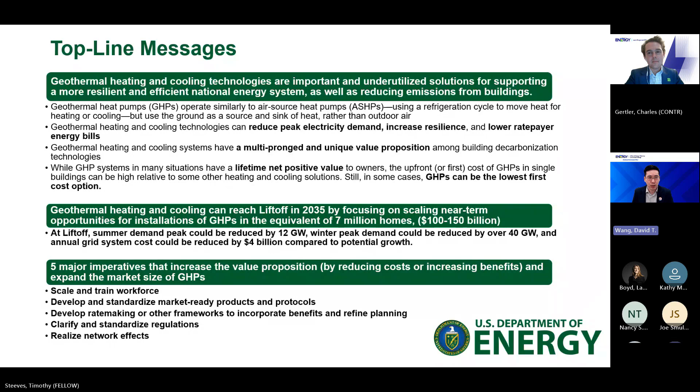So just going through some of the key takeaways first here from Chapter 1, and then we're going to jump into some of the selected analyses. But Chapter 1 is sort of the introduction to geothermal heating and cooling technologies. It describes how they can simultaneously help achieve energy security, energy efficiency, customer resilience, and energy affordability goals at scale, and help manage some emerging load and peak demand growth issues.

And so David described how GHPs operate similarly to air source heat pumps. Chapter 1 also goes in detail into the benefits of connecting buildings via piped fluid at ambient temperatures, the thermal energy networks, or TENs, that leverage the benefits of GHPs. So I promise, I think the only two acronyms we'll keep using over and over again are TENs and GHPs, but they're important ones here. And we'll also describe the value proposition in detail.

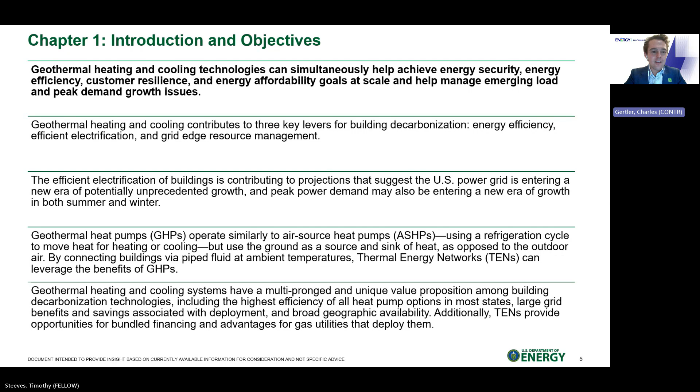So Tim, if we can go to the next slide, I think we'll start just by describing what actually are geothermal heating and cooling solutions. They use the ground as a source or sink of heat, circulate fluids, often connected to heat pumps, to maintain temperatures in buildings. Importantly, they can serve single buildings, they can underpin network systems, and our report focuses on geothermal heat pumps, GHPs, which are the systems that use heat pumps in the shallow earth from a few feet below the ground to about 300 feet.

And these are the systems that operate similarly to air source heat pumps in that they use a refrigeration cycle to move heat around, but they use the ground as a source or sink of heat. And because of that, they can achieve very high efficiencies because they reduce the influence of weather on the heat source or sink. In 2023, there were geothermal heat pumps in about 1.3 million, or 1% of American homes, compared to 13% with an air source heat pump and 86% with no heat pump.

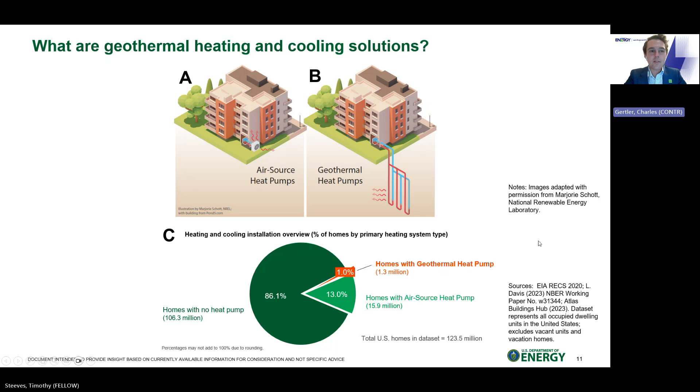And let's go to the next slide here. We can talk a bit about thermal energy networks, or TENs, where a series of GHPs connected together comprise a TEN. So let's drill in here for a second. They connect buildings via piped fluid at ambient temperatures. They leverage all the benefits of GHPs, and they use shared boreholes and heat exchangers that are connected to a shared network of piped fluids. So then they can boost or lower the working fluid to the operational temperature at the building level for heating and cooling.

What I think is very cool about TENs is that different heating and cooling needs within the network can be met at the same time. So you can have a smoothed system. You can imagine a hospital that requires cooling even in winter for medical storage, say, that's connected to schools and apartments that require heating. So there's a give and take that leads to even higher efficiency. And as Jigar mentioned up front, infrastructure and capital needs to construct TENs can be bundled, so utilities can increasingly participate in their construction.

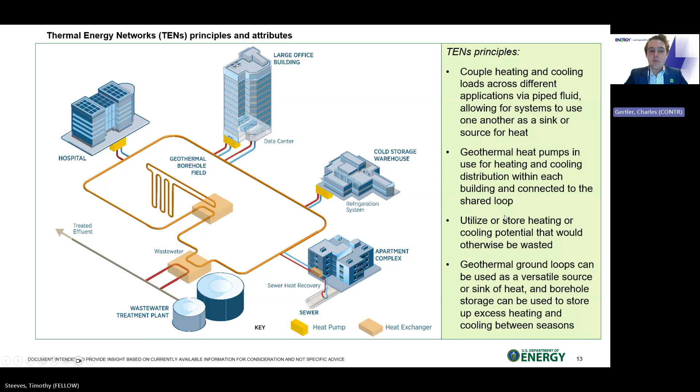So let's talk a bit about the geothermal heating and cooling value chain on the next slide here. It involves a number of different stakeholders and decision makers at every level, from the upstream in the light gray to the midstream in the medium gray to the downstream in the dark gray here on this slide. Each stakeholder has distinct roles, distinct responsibilities. They can be organized at the international, national, regional, or even the local level. And what's more, the way that they collaborate depends really on whether the construction is for a single building versus a thermal energy network, or for a new build versus a retrofit.

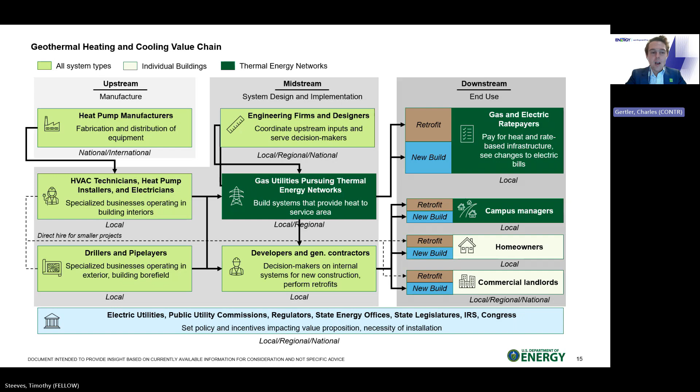So I'm not going to go into full detail on this figure here. It's featured in the Liftoff report, but it maps the sort of complex interactions along the value chain depending on the installation type. Finally, I just want to go a bit into the value proposition on the next slide here.

Stress that, as David mentioned, geothermal heating and cooling systems have a multi-pronged and a unique value proposition among building decarbonization technologies. So first, when you're accounting for weather across the US, GHPs have the highest coefficient of performance, which is a measure of efficiency, of all heat pumps in most states. So this high efficiency means that the potential for reduction in utility energy bills is also the highest among all options for heating and cooling.

They also have large potential grid benefits and savings. So upgrading to GHPs reduces the peak load on the grid in all climate zones, in all seasons, except for winter peak load in cold climate zones. And in scenarios where there's high electrification, the grid benefits can also lead to large benefits in other parameters like summer and winter peak demand and cumulative system cost.

So because of this, GHPs may be the best choice for heating and cooling in a number of geographies, and in particular in colder regions that also experience significant summer heat, like my home state of Massachusetts. They also have very long lifespans. Outside components can last 100 years or more. The heat pumps themselves are shielded from weather, also comparatively long-lived. And expenditures flow mainly to upstream and midstream stakeholders in the value chain, which are predominantly local and regional workers and small businesses, which creates local and regional jobs.

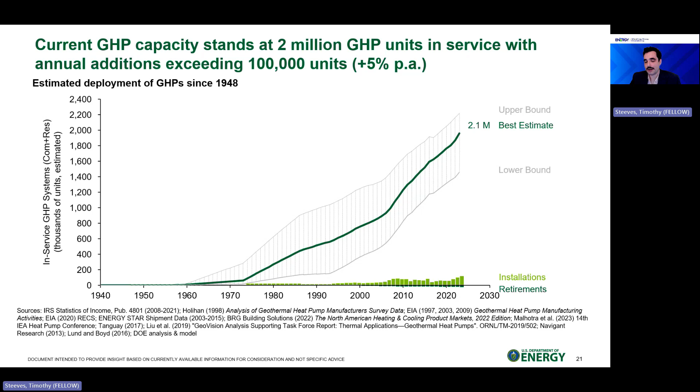So we're building this thing, and I think a good number maybe to bring up here, when you're looking at this 2.1 million in service, is that annually about 3 million air source heat pumps and 3 million gas furnaces are installed each year. So we're really, as we saw in that earlier figure, a very, very small sliver of the market right now with geothermal heating and cooling.

We should have got rid of that draft thing. This is no longer a draft, thankfully.

So this is the estimated national median cost of installation for a geothermal heat pump, both in a residential and a commercial installation. And this is very median, and you may have wildly different costs, and I've seen things differ in both directions here. But you have a rather large capital expenditure that's split pretty evenly between the loop installation and the non-loop mechanical HVAC, and then a certain amount for the weatherization and retrofit cost that you may have to add in there. So if you're a new build, you don't have any of that cost, but if you're an older building, you may have way, way more than this.

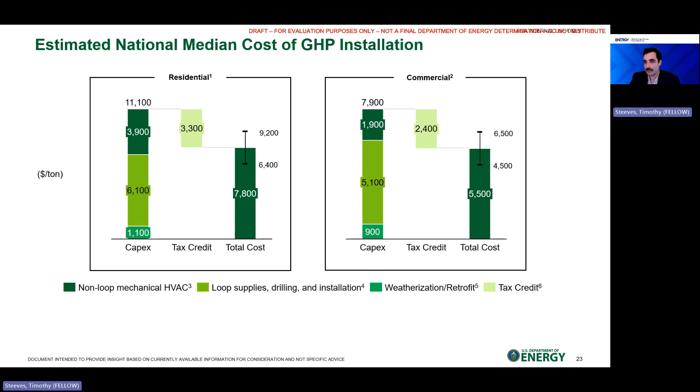Then you have the tax credits that in general offset around 30% of the cost, that bring you down to a total cost that's a little bit more affordable, but still quite high on a cost per ton basis. And as you can see, you have a lower cost on the commercial side of things, both because you have a little bit lower cost of the mechanical HVAC, and also you get less costs on the loop supplies because you can build a larger system, which gets you some economy of scale going.

I wanted to highlight real quick here, this is something that we did in a few different places. We looked at some economics of scenarios where you might have really, really affordable housing retrofits. So as you may know, there's a low-income housing tax credit that's either 9%, if it's awarded competitively, in very specific areas, or 4%, which is the more common version of this. But those credits are awarded annually for 10 years, so you end up with 40 or 90% of the cost of your housing that can be taken back in a tax credit.

And so you can end up with these systems that cost quite a bit, but you're getting quite a bit of money back in your tax credit by building it out with this thing. So we wanted to highlight here these potential monetized credits and what you could bring in, in cases where you can bring down the total cost of the system to be technically negative, or in many cases on par with the next most efficient option. A lot of this has to do with the ways in which geothermal tax credits are calculated, and we go into a lot of detail on that in the report.

Moving on a little bit, another set of statistics that we pulled together was about the workforce that supports geothermal heating and cooling. As you may have heard me talk about a lot of different aspects of the installation, you end up with a whole skilled workforce that supports these things. So we broke it out broadly into 4 categories: the drillers, the pipe layers and the loopers, so people who are actually installing that ground loop, maybe after some drilling has occurred.

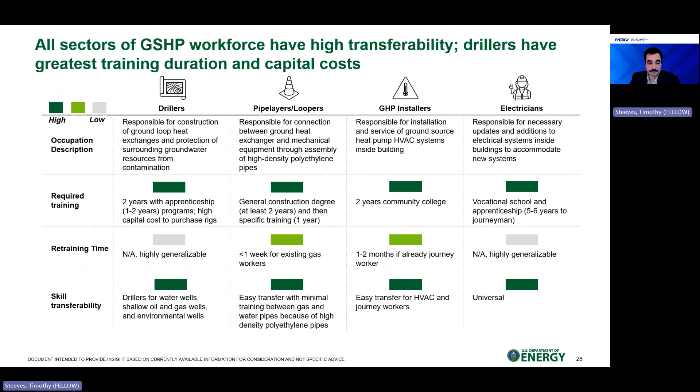So this is just a summary of this thing, and I'm going to use it to segue into our discussion here about the workforce supporting this, which is, again, a relatively small workforce, especially the drillers. We have drillers from oil and gas, and outside of oil and gas, and both of those together barely top 30,000 right now. Which is just not a huge workforce, and it's highly regionalized.

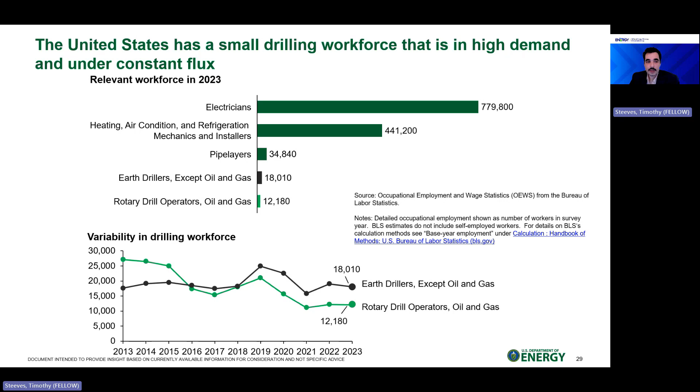So people might have a small business that owns a few drill rigs in one part of the country, and having to scale that workforce up very, very quickly could be quite difficult. So this is one place that we've identified as a possible bottleneck that could be addressed with some intervention on the public and private sectors. So with that, I'm going to pass it back over to my colleagues to talk about Chapter 3.

Excellent. Thank you, Tim. So chapter 3 covers the pathway to commercial liftoff and scale for geothermal heat pumps. I'm actually not going to go through the takeaways here for the sake of time because many of these have been brought up already. Let's jump right into the analyses that we want to highlight.

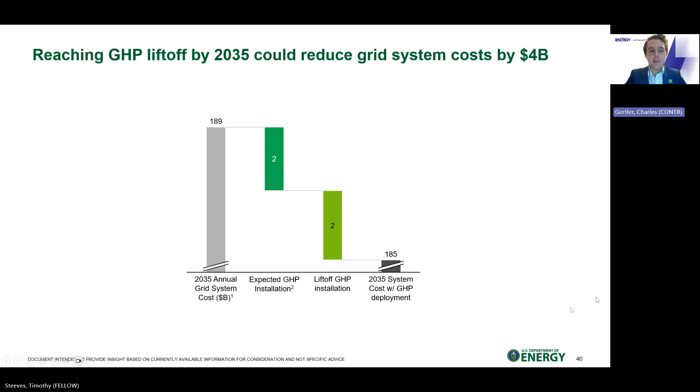There are other benefits from geothermal heating and cooling at liftoff. These taken together could reduce the overall grid system costs with a potential savings of $4 billion or 2% through reductions in capacity, transmission, and other maintenance needs, which we can discuss on the next slide. Here, this is just the savings, and then I just want to take a look at how these savings could be used to incentivize deployment. So on the next slide, we'll see that there's a potential pool of capital from these savings to fund incentives for ground source heat pump deployment.

Yeah, thanks, Charles. In chapter 4, just in the last few minutes here, we cover the challenges to mass commercialization and scale for the geothermal heat pump and geothermal heating and cooling industry. And we talk about ways that we can overcome those challenges at various levels of community and nation. We'll highlight just a few of them here, and you can read the report at your own leisure for some details. The first challenge, as we mentioned ad nauseam before, is that the GHP workforce really needs to be enabled and scaled up in order to build that groundwork for mass commercialization and have that ready workforce. And we'll talk about that in just the next slide.

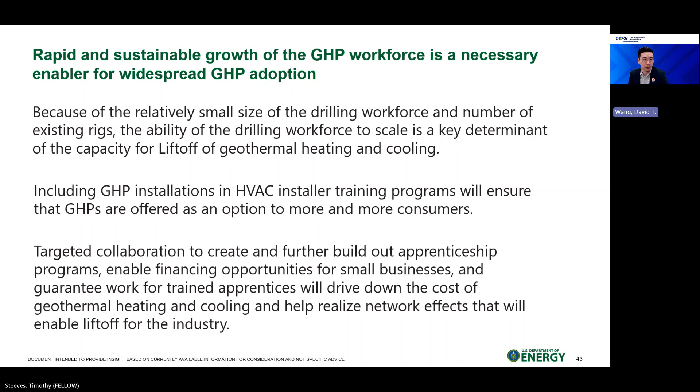Next slide, please. One of the things that we are doing about this at the DOE is we've launched, as Lauren mentioned earlier, a prize called the Geothermal Heat Pumps Partnerships to Accelerate Training and Hiring, or GHP Paths Prize. You can find more information about that in the link here on the slide, or by following that QR code there. Phase 1 submissions are open until February 12th.

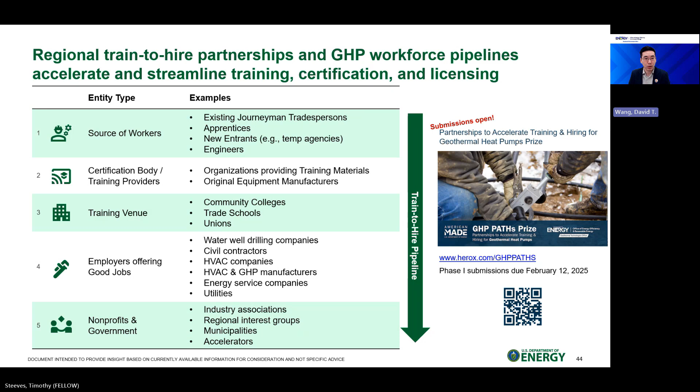And this prize is really meant to stand up these regional train to hire partnerships and create or enhance those existing GHP workforce pipelines in particular regions to accelerate that connection between people who want those jobs and want those skills and employers who have those good jobs and demand those skills.

We could also minimize the potential amount of stranded gas assets by deploying heat pumps where gas distribution systems are in need of replacement. That can help avoid shifting more of the cost burden of maintenance capital onto an increasingly smaller fraction of remaining gas customers. The rest of Chapter 4 covers a number of the other regulatory, business, and technology levers, like value engineering of heat exchangers, to help achieve GHP liftoff by 2035. We really encourage you to read the report for further details.

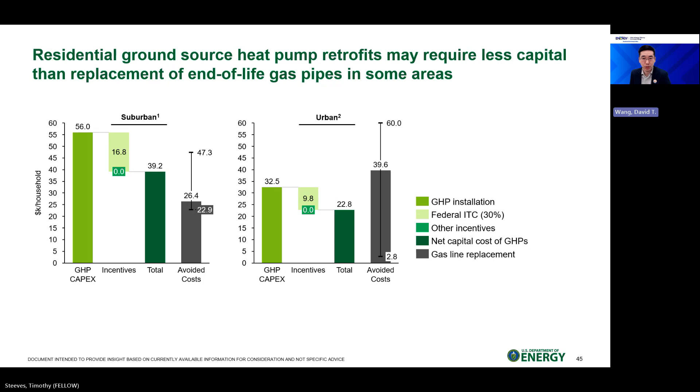Next slide, please. We'd again like to thank all the authors and contributors of this report, as well as the extensive engagement and support from the private sector in finding the facts and putting together the key messages in this report. As a final reminder, these reports are living documents. External engagement is what gives this meaning.